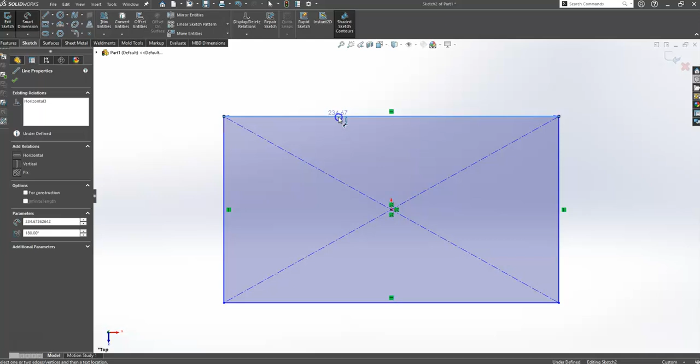Alright, so create our sketch again on any plane. We'll do our center rectangle and put our smart dimension on it, 350 by 150. Then we'll exit the sketch and extrude it 10 millimeters.

That looks good. The next command is the hole wizard. We're doing a tapped hole, an ISO standard, bottoming tapped hole, through all, M6. It's good practice to have a near side countersink on it, something like 6.5 or 7 millimeters, so the threads below the surface of the material is always good.

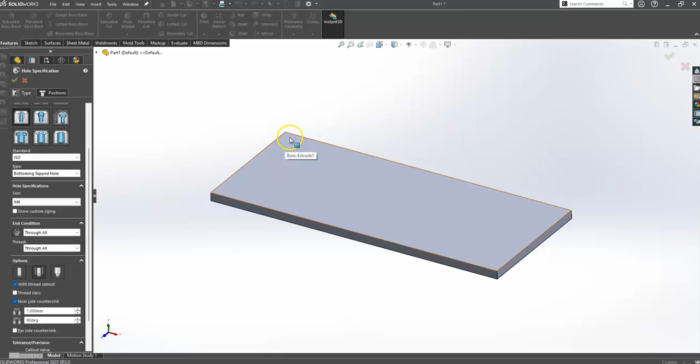So we do a position here, and because we want one in each corner, we can select the position. Don't touch any of these options, we'll cover them again. Just pick the face and put one hole in the corner and go straight up with the smart dimension.

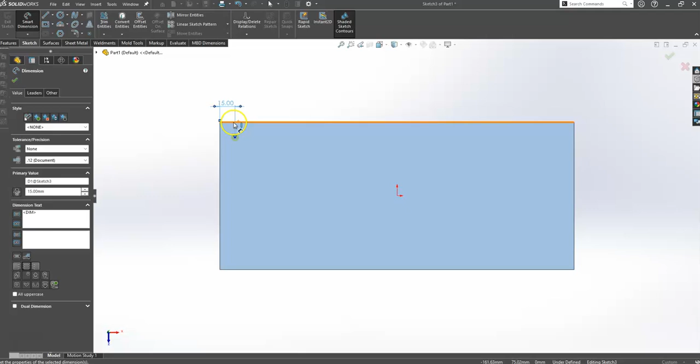You have two options. If you want to just put a hole in, say 15 millimeters from each corner, that's one way. These are only for feet or something like that, so they're not that important. If they're 15 millimeters from each corner, it means if you make the plate bigger or smaller, the hole will always be 15 millimeters from each corner. That's all I do there.

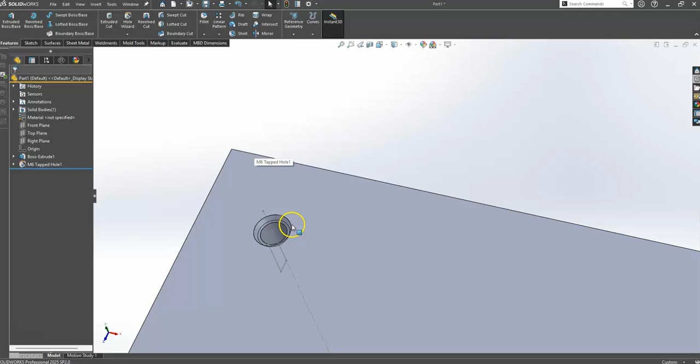Okay, I can accept that now, and I have one 6 millimeter tapped hole. I can't see the threads on that. If you want to see the threads, go to settings, document properties, detailing, and shaded cosmetic threads. Now you see the shaded cosmetic threads in the part.

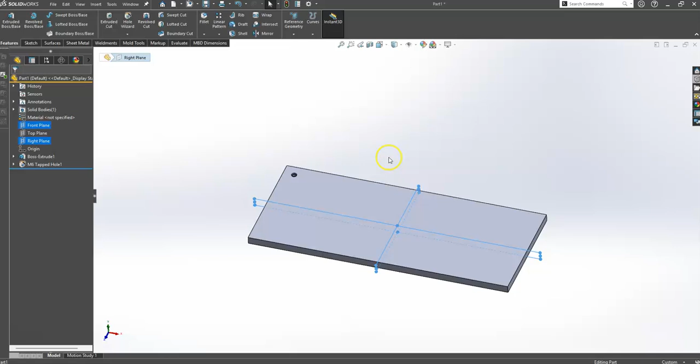Now the next thing I want to do is take advantage of symmetry. I have these two work planes here that I can use. So if I mirror this hole across here and then mirror it down here - SolidWorks now allows you to mirror using two planes. If I pick the feature I want to mirror, that hole, you see I've selected this front plane and it's mirrored it here.

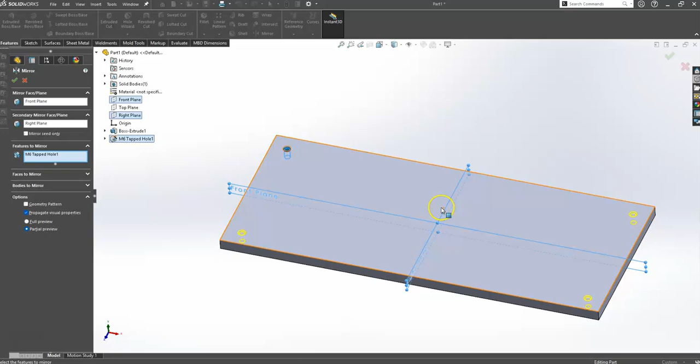I can do a secondary plane, which is this one in the middle, and now it mirrors it twice. So it mirrors the mirror, which gives you the 4 holes, and you know they're 15 millimeters in from each corner because I've kept the plate in the middle the whole time, with the two work planes in the middle of the part. That's kind of critical there. So I've taken full advantage of symmetry, which is really good.

So our next command is a hole wizard, and I'm going to do a tapped hole again, let's say it's M6. It's for the bearing blocks that we were doing. Again, I just check what size it is, but I think it's M6. This time it's a wee bit different.

I'm going to go position, and select the face. What I'm going to do here is just put 2 holes down at the moment. Then I can hit escape on my keyboard, and they're the 2 tapped holes, but I need to position them.

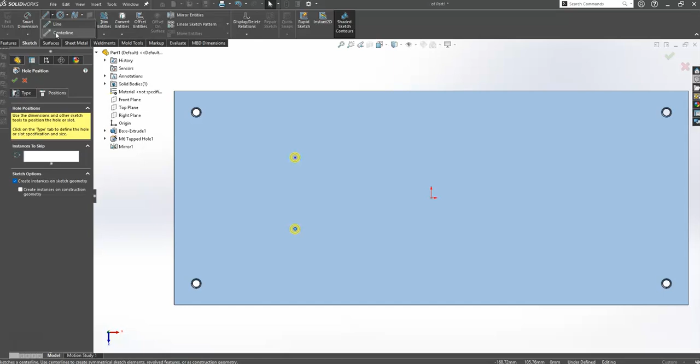So I need a wee bit of construction geometry here. What I like to use is just a center line from the center of my point out to about there. Any size. I double click there and cancel that.

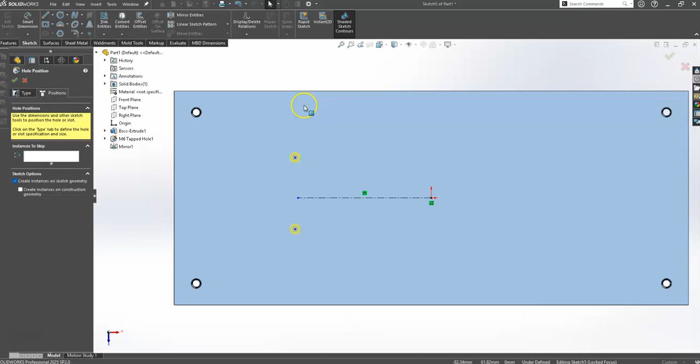Then what I'm going to use here, there's a nice wee line I can use - a midpoint line. I'll go and do another center line here, from here down to there, so that's from center to center.

And then if I pick this end point and hold control on the keyboard and pick that line, see that midpoint coming up, there's a wee symbol there for midpoint. I can make the two of them coinciding - so I made the midpoint of this line and the end of that line coinciding.

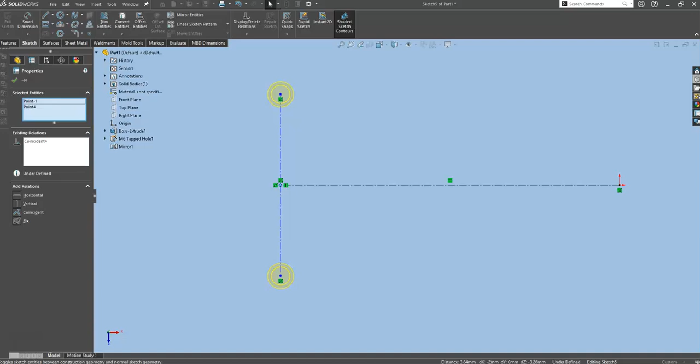That means that as I put a smart dimension on this, it will both be symmetrical, see that? Because it's the midpoint of the line. I think it's 70 is the dimension we're looking at. Then we can put a dimension in for the distance out, whatever that was.

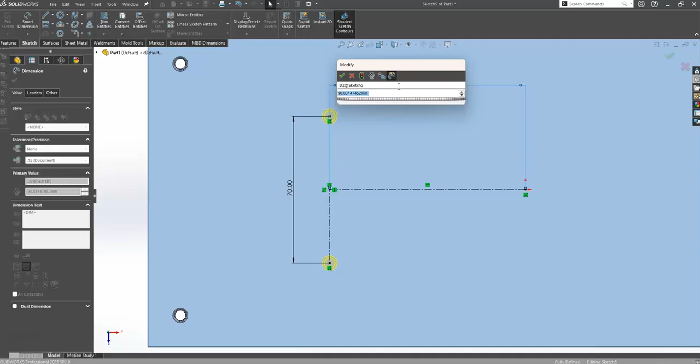I want to say 120, I just forget the exact size. Okay, and that should allow us to clear the rollers. So by doing that sketch there, I basically get to position the holes where I want to position them.

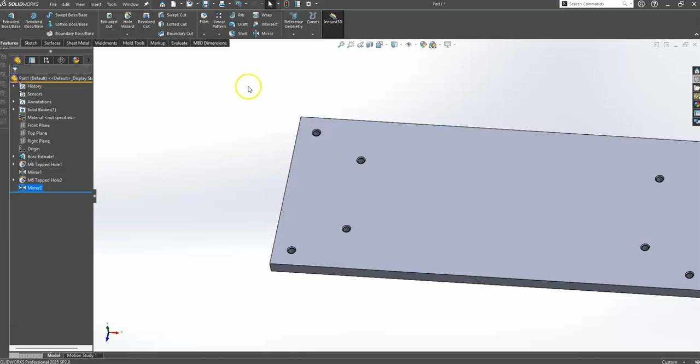All right, and again, I can pick these 2 holes and use my mirror command again. This time I'm only going to mirror the 1, and mirror them over. It kind of makes sense to do the 2 there because these are for the bearing housing that's going to sit down on it.

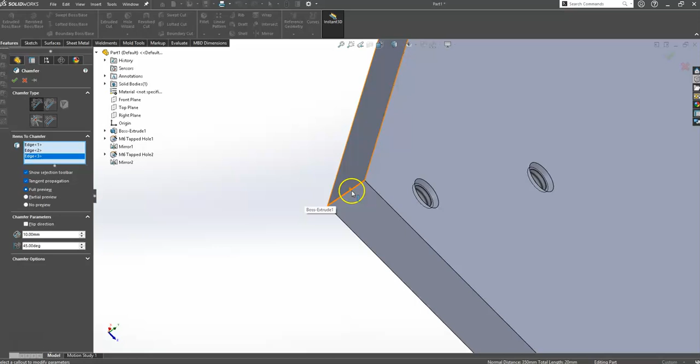Then the last thing I'm going to do is chamfer the edges of the part in 3D. I normally leave these to 3D. Again, the chamfer is just a feature, not critical, but we don't like to leave the corners of the plates sharp. So just pick the 4 corners there. Make sure you have full preview on so you can see what's happening. About 10 millimeters is fine, 10 by 45.

So that's it, so make sure you save the part. Just go to save. All right, with that saved now.

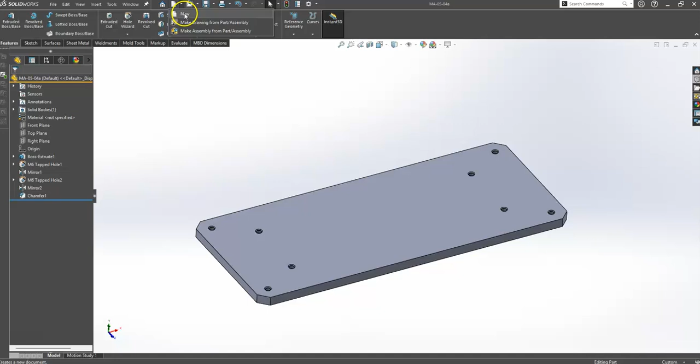So we can do a quick drawing of that while we're at it. I can do a new drawing from part assembly or a new one. I'm going to do new because I have a manufacturing title block here. Again, I can go to my view palette and pick the drawing I want to use, the one we're after doing, and drag it in. This is the main view of the drawing.

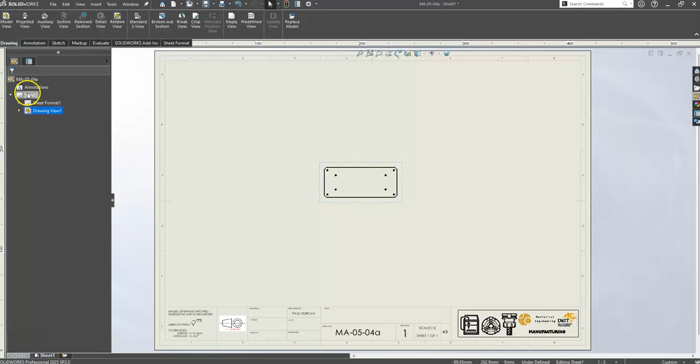What I want to do there is make sure I'm in first angle projection and the scale is right. So if I right click on sheet 1, hit properties, and make sure it's in first angle, which it is, and adjust the scale.

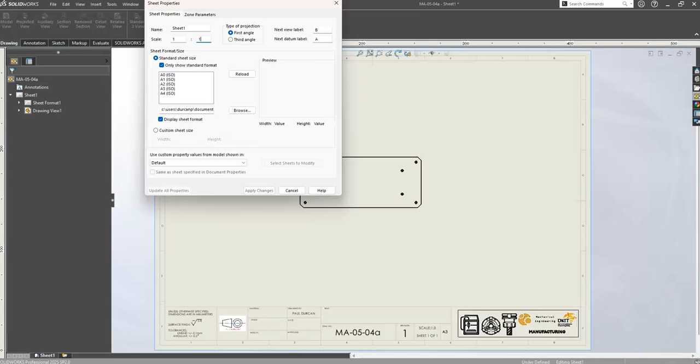Maybe if it's 1:5, maybe make it 1:3. If I get it wrong, I'll just go back in and do it. Okay, so it got a bit bigger there, but not big enough. So again, right click properties, and I'm going to say 1:2. I'm going to go 1:1. Okay, and that's probably a wee bit too big.

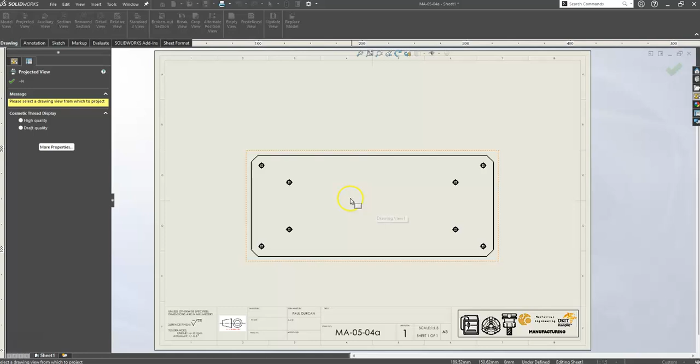So again, don't be afraid to change it. Properties, I'll do 1:1.5. And that doesn't look too bad. I can just do an elevation of that. I don't think there's much need to do a section view or anything like that. Just like that there, okay.

And again, I need to do my smart dimensions, and I typically do the thickness of the plate. I can take a corner here to be my reference. What I'm going to do is not use standard dimensions here. I could use a baseline dimension or I could use an ordinate dimension.

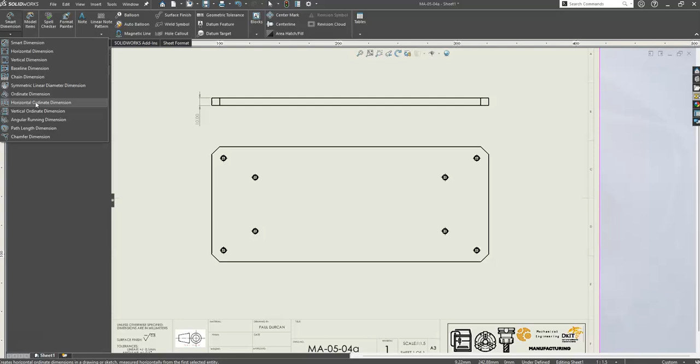So for the likes of these holes, I like to use ordinate dimensions. I'm going to leave this bottom left-hand corner as my 0. So this is 0, and then all I need to do is hole number 1, hole number 2, hole number 3, hole number 4. So that's kind of the X coordinates.

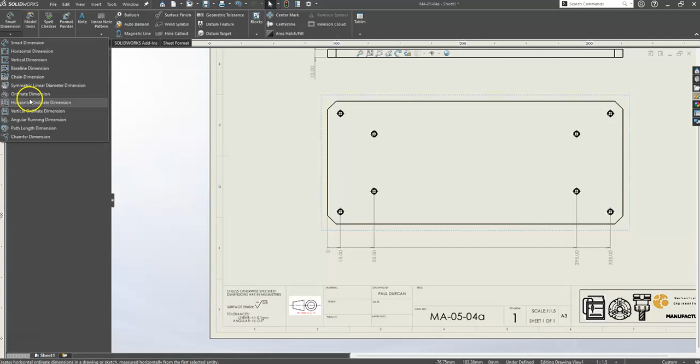That's okay, and then I'm going to do ordinate dimension vertical, which will give me my Y coordinates. So there's my 0, there's one Y, there's another one, there's another one, and there's another one. And that's it, so it's really just for the holes.

And then I'd use my normal dimensions for the overall length of the plate, and then obviously for the overall height of the plate.

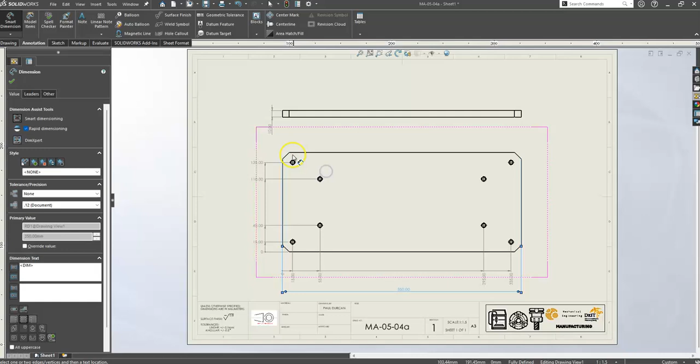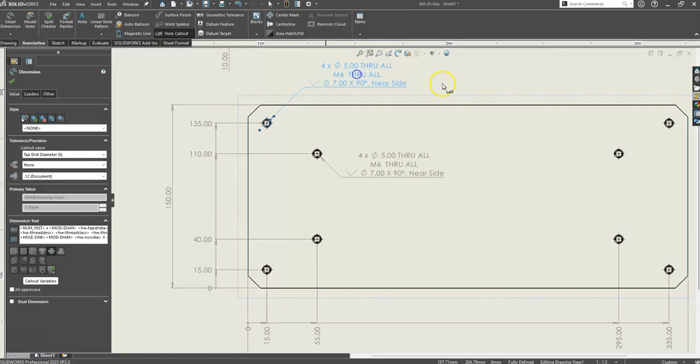Okay, and I have the advantage that I used the hole wizard, so I can use the hole call out and pick that hole, and it knows there's 4 holes, M6. That's the 4 holes in the middle. And then these 4 holes on the outside are a different pattern as well, but the exact same detail. So it's 4 and 4, which would be kind of okay to do.

And the last thing I would do is just the chamfer here. I just dimension the chamfer, so 10, okay, by—you can do 10 by 10 or 10 by 45 and use the wee degree symbol—and hit OK. So that'll be the drawing done.

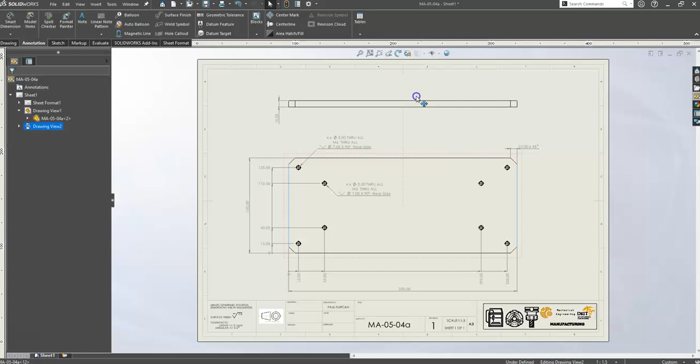We have to fill in the title block with our titles, our properties and all that. We want to space our views as well, make sure they're in the center of the sheet and at a good scale, all right? And make sure you save your file, same name as your CAD model.